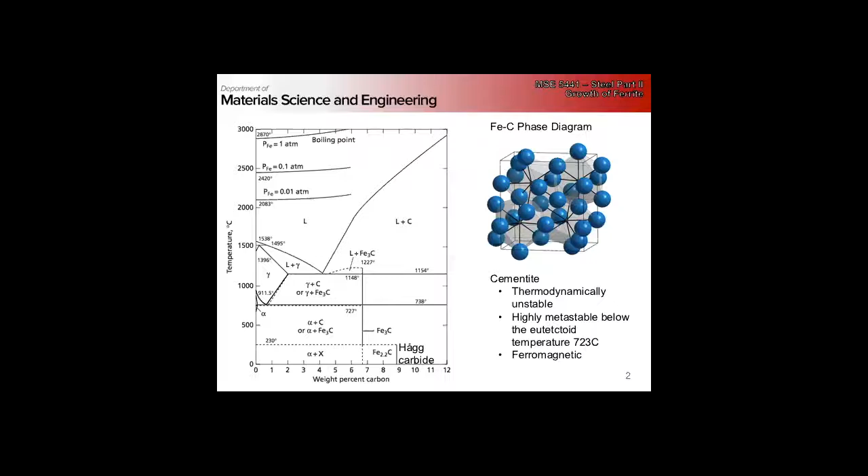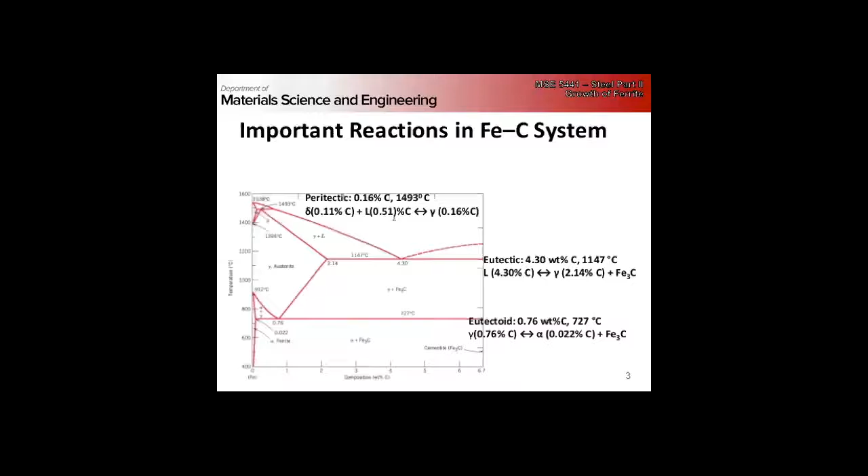Okay, so we started going through looking a little more carefully at the equilibrium, or metastable, iron carbide phase diagram. We pointed out that for the most part we're going to be concerned with the formation of ferrite and cementite and how this happens, but there are other carbides that can come up, such as Hägg carbide. We identified important reactions in the system, and we said that the peritectic reaction doesn't have too much of an effect, but really we're mostly concerned about things happening near the eutectoid region.

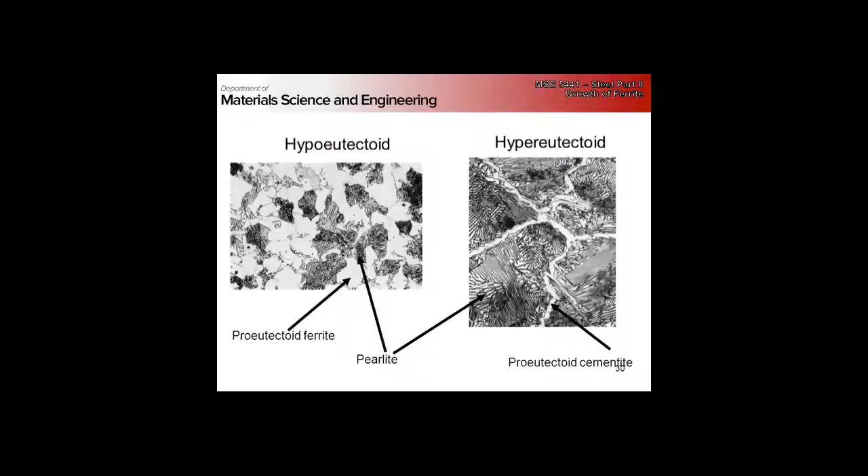And we looked at structures that come from hypereutectoid and hypoeutectoid. If we're light on carbon, then we get regions of ferrite with pearlite interdispersed. If we're hypereutectoid, we have proeutectoid cementite that forms on the prior austenite grain boundaries, and then the rest of the prior austenite grain transforms into pearlite. We'll be talking a lot more about pearlite on Friday.

So we have two main classes of transformation — I wouldn't call them mechanisms, because each has its own different mechanisms, but two main classes: reconstructive, which are basically diffusion-mediated transformations, and displacive, which involve an invariant shear or a plane strain. We also introduced this notion of para-equilibrium nucleation, which says these things are happening on a time scale such that carbon can easily diffuse, being interstitial, but the substitutional elements just physically don't have the time to diffuse. So we're not at a true thermodynamic equilibrium, we're at a para-equilibrium state.

And the proeutectoid ferrite nucleates heterogeneously at the austenite grain boundaries, and typically the ferrite nucleates with a preferential orientation relationship with one of the austenite grains. It forms this Kurdjumov-Sachs orientation relationship.

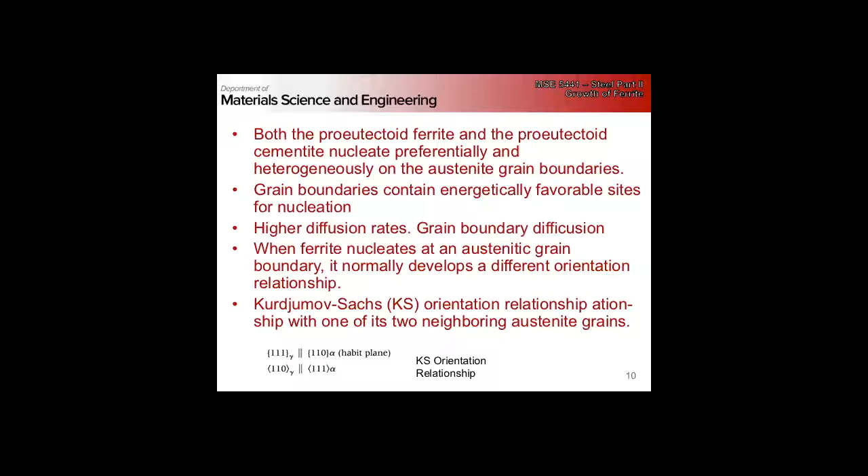Where we have the (111) plane on the gamma parallel to a (110) type plane in the ferrite, and the close-packed directions lining up. So basically this can be envisioned as a 90-degree rotation about a [211] direction, and it's worthwhile to take the time to sketch out these planes, exactly what is related to what.

Now this Kurdjumov-Sachs relationship, I said, forms preferentially with one of the two grains. But this is a very low energy relationship—it maintains that the close-packed directions don't actually change. This is a low energy interface that has virtually no mobility.

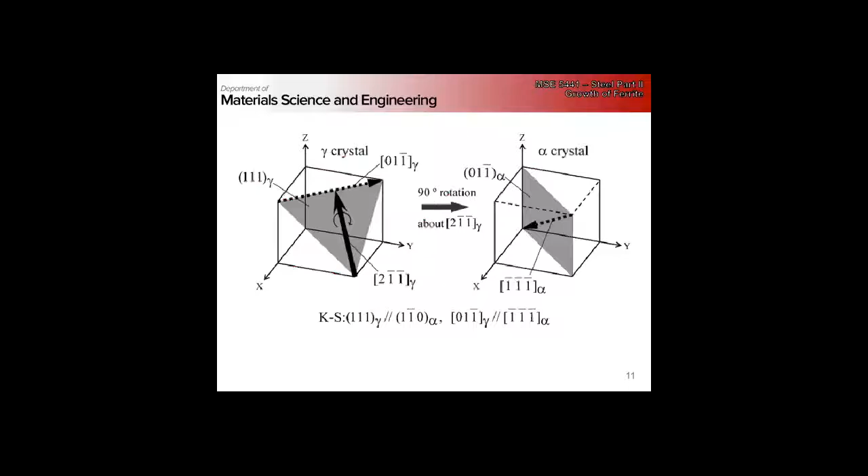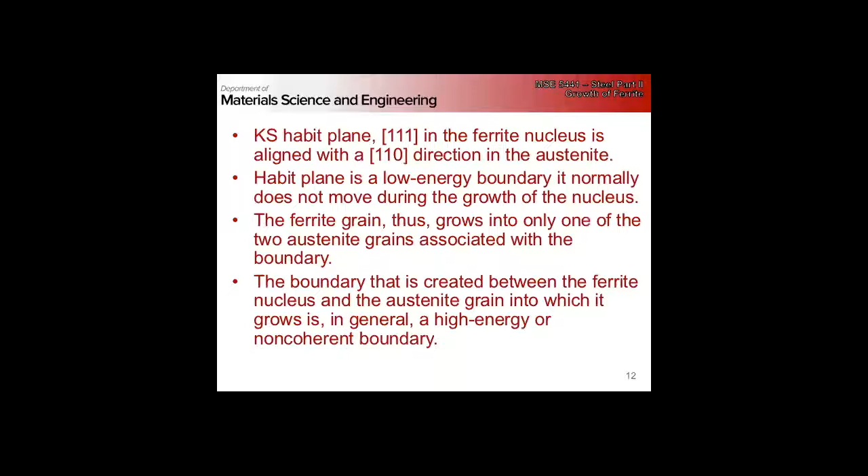So this relationship is formed with one of the two austenite grains, then our ferrite will grow into the other, leaving this relationship fixed. The boundary between the ferrite and the austenite grain into which it's growing is generally going to be a high energy, or non-coherent, interface.

We also looked at two different morphologies, which grow in different ways. The first is ferrite allotriomorphs, which grow on the grain boundary and follow the grain contour. Then idiomorphs, which nucleate heterogeneously from an inclusion in the crystal, but grow as a single crystal of ferrite, with faceted shapes that reflect the symmetry of the ferrite crystal. These nucleate without any contact with the austenite grain boundaries.

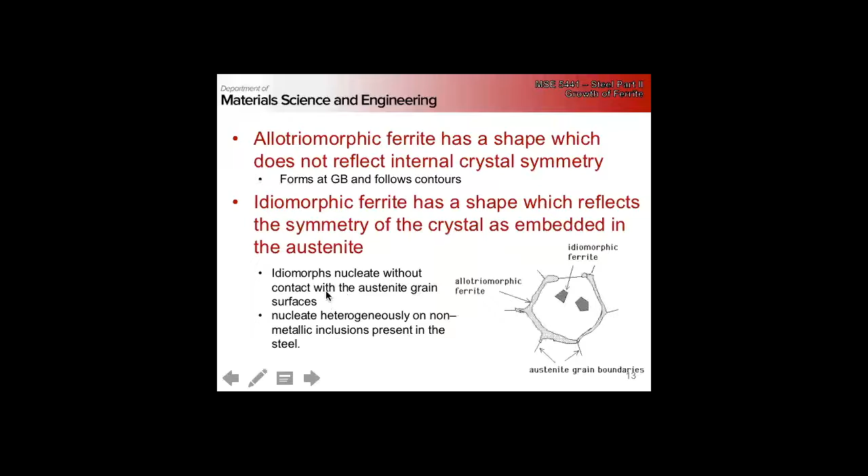Both of these occur by true diffusional mechanisms. So we don't have any shear, we don't have an invariant plane strain shape change like we will with the Widmanstatten structures. And the growth rate is either diffusion controlled or interface controlled.

Here we're nucleating these primarily heterogeneously, but this is still only going to occur at high homologous temperatures, near our eutectoid temperature. If we get too low, we're going to grow Widmanstatten. If we get even lower, it's going to be bainite. If we get even lower in temperature, it's going to be martensite.

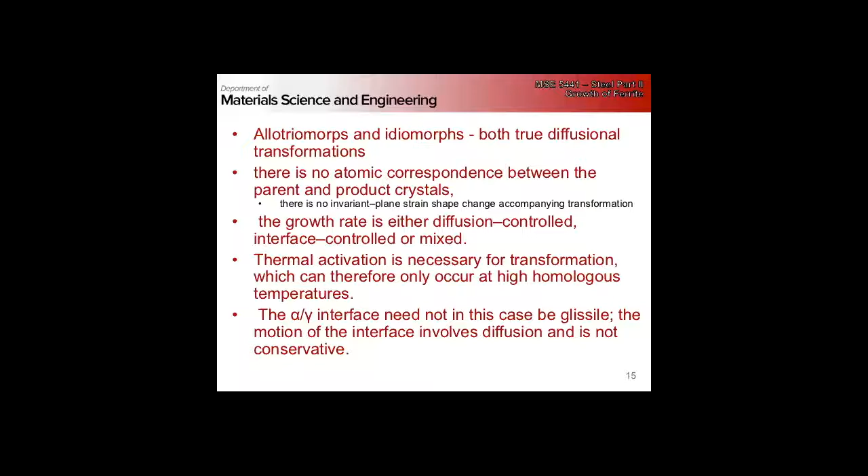How does Widmanstatten vary from idiomorphic? We'll get there - that's the next set of stuff that we got here.

Because it's diffusional growth, our main limitation is going to be diffusion of carbon in front of the interface. We're rejecting carbon from the ferrite, so we get a partitioning - a diffusion field building up in front of our growing ferrite. As our ferrite gets larger, the extent of this field gets larger, and that's actually going to retard the growth because our carbon has to diffuse over longer distances. Our thickness of ferrite increases as a dependency on the square root of time, meaning that the growth rate slows down.

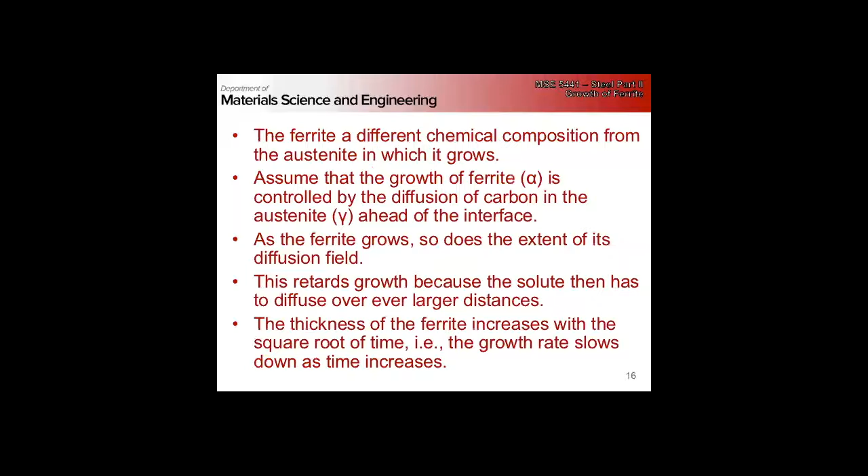I didn't put the complete derivation here, but this is basically the general idea behind modeling this. In the ferrite, we have a carbon concentration here. In the austenite, we have a carbon concentration here, if this is our overall alloy composition - this is our composition in the austenite region. We come down, we start to partition by the lever rule. So if this is ferrite here, this is the ferrite austenite interface. Here's our overall carbon concentration of our austenite. We now have this diffusion profile out in front.

We can model this by saying that the rate at which the solute is being partitioned has to be equal to the diffusion flux from the interface. So all of the carbon coming out of the ferrite has to go through that interface - it's just a balance. Then we give our conservation of mass, combine that with the diffusion equations, and we get a PDE that looks like this for the change in the position of our interface with respect to time, as a function of our diffusivities and our concentrations and the current position of the interface.

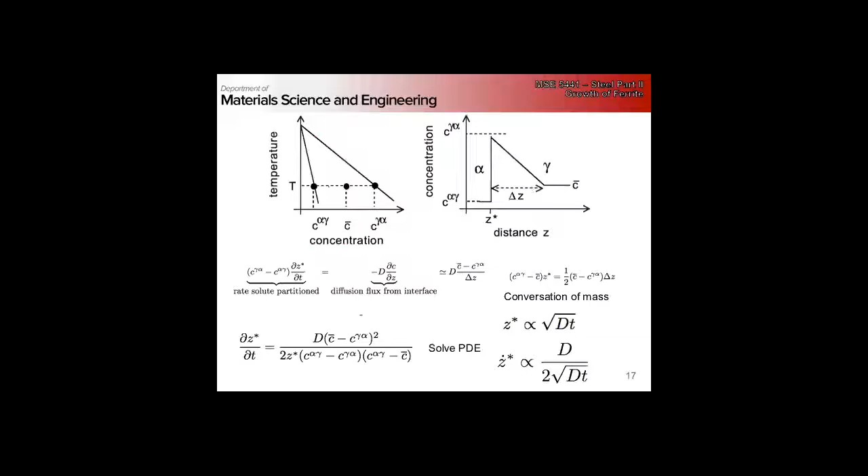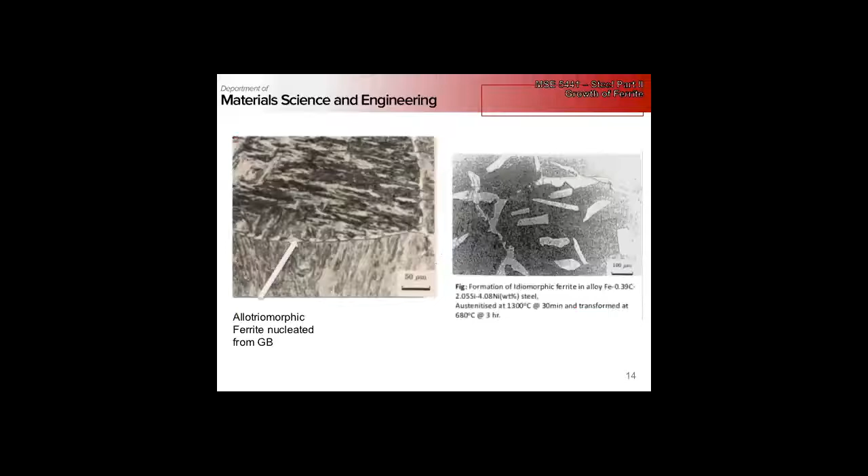No, I was just thinking of what the structure—how does this growth rate tie back to what we see in the micrographs? We don't tend to see idiomorphs with huge size disparities inside the grain; we tend to see them all about the same sort of size.

But thanks for that introduction into massive ferrite. So if our carbon content is low enough, and if we can cool our alloy quickly enough to avoid partitioning, but slowly enough to avoid martensite, we can get a massive transformation. That's reconstructive, a diffusion-mediated transformation where our ferrite is the same composition as our austenite.

And that's only going to depend on short-range diffusion, because everything is the same composition—we're not partitioning carbon out from our ferrite, so we don't have a diffusion field out in front. It's only atomic jumps across the growing interface, so it's interface controlled.

How does that work out relative to the free energy diagram? Because if you have one phase transforming to another, wouldn't you need to change composition? Yeah, so what does that imply?

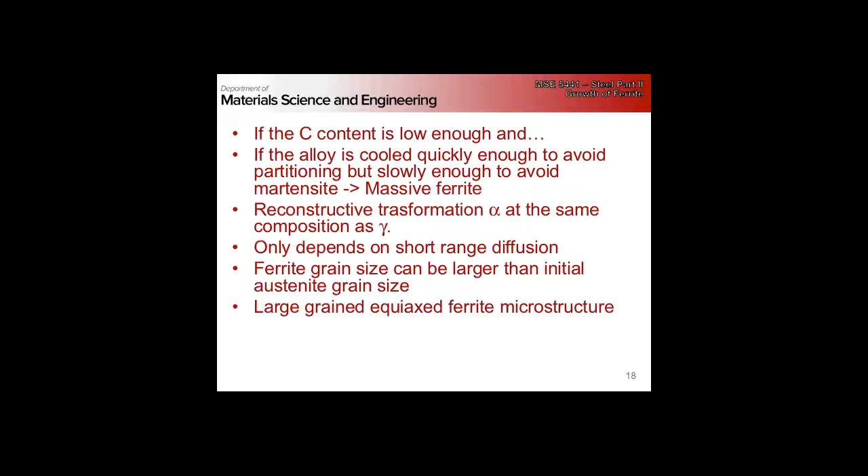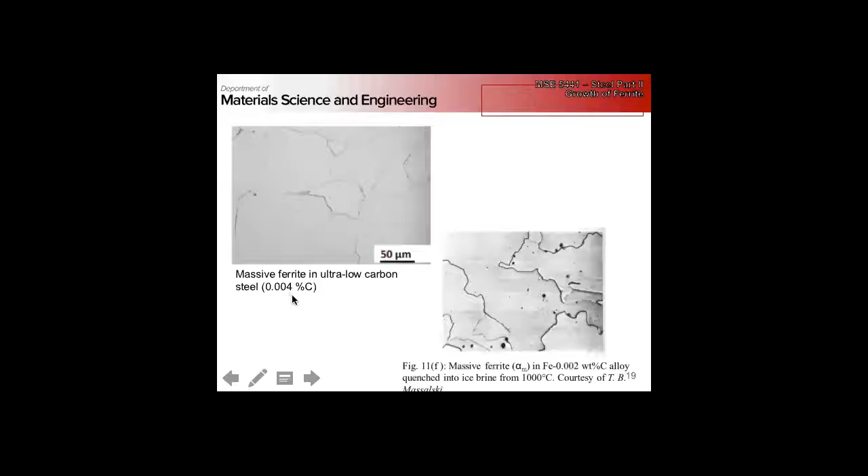So we have microstructures that look like this, nice, not perfectly clean equiaxed, right? But notice the carbon contents of these. These are ultra low carbon steels. This is 0.004 percent carbon, so 4/1000 of a percent, 2/1000, by weight.

Okay, so back here, now we're going to move on over into the displacive transformations. We're going to talk about Widmanstatten ferrite, and then on to Pearlite, then back to bainite and martensite. So we're sort of hopping a little bit here.

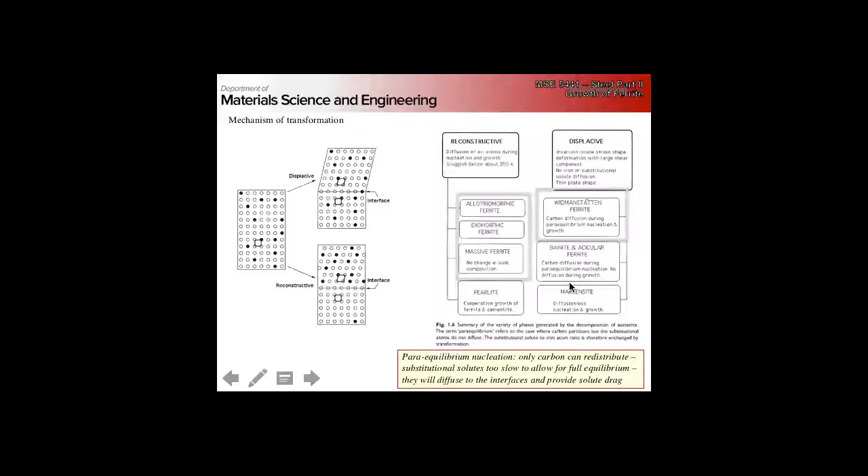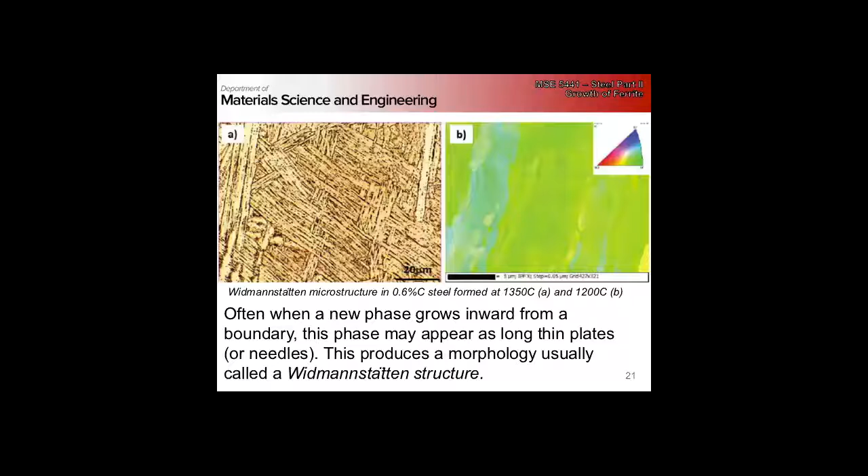So we have two basic classes. We've got primary Widmanstatten ferrite that grows directly from the austenite grain boundaries, and then secondary that grows from any grain boundary ferrite that happens to be there, so any allotriomorphs of ferrite that happen to be there. And this is a displacive transformation.

And so there's a shear associated with this. So you can imagine if I'm nucleating and growing, and I've got a shear, this is going to give me this sort of jog on my surface, or in my crystal, that this needs to be accommodated. And if this is in a polycrystal, I've got neighboring grains that are pushing back on this. As this grows, that shear gets larger and larger.

You can imagine a deck of cards, and I offset one card next to its neighbor by a small amount. But if I do that for every card, that shear just builds up and up and up. Eventually, if I take that small shear across the whole deck of cards, I've got a big displacement from one side to the other. So this is happening, and energetically...

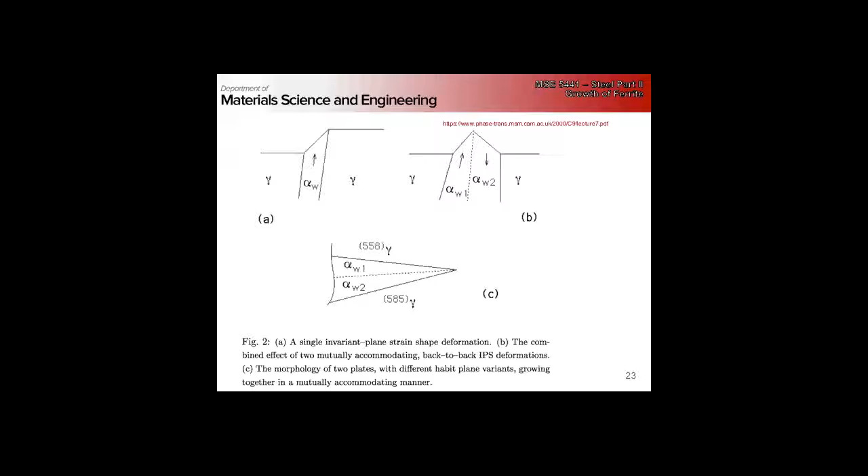Okay, so carbon does partition. Again, we're always at para-equilibrium, and we're going to grow at a diffusion-controlled rate. The rate is going to be controlled by the diffusion of carbon ahead of the plate tip. So, unlike idiomorphs, which are growing out in all directions, here we're growing along a plate.

So the analysis of this becomes similar to the growth of dendrites. The tip is always growing into fresh austenite. Our carbon can be partitioned out the sides, whereas our tip is always growing into fresh austenite.

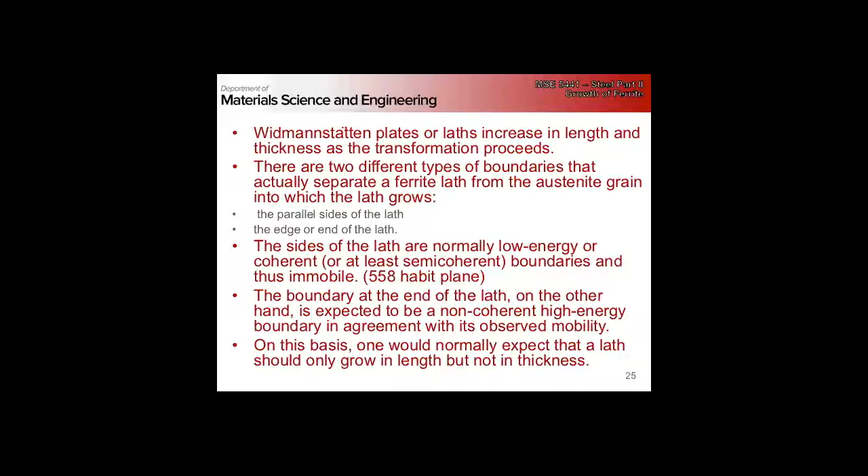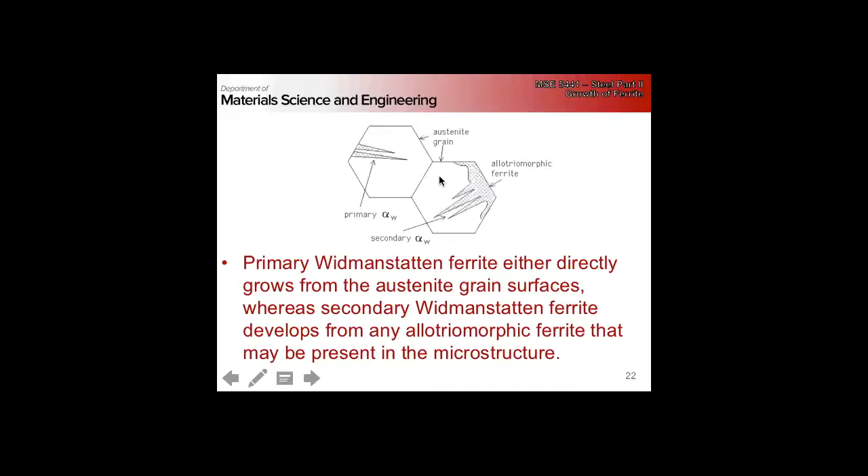They grow across. If we go back to our little picture here, they nucleate and grow across, but eventually have to thicken to come in contact with each other and transform. This won't be the last time you see this, but basically what happens is these laths thicken as a result of ledges or steps.

Imagine here, this part of the ledge is our coherent low energy interface. We don't have much mobility orthogonal to this direction, but if our interface is made up of these steps, we have high energy interfaces here with high mobility. So this can grow by extending the ledge, all of these ledges this way. We can actually have thickening of the laths without breaking that coherency, without destroying the coherency of the interface.

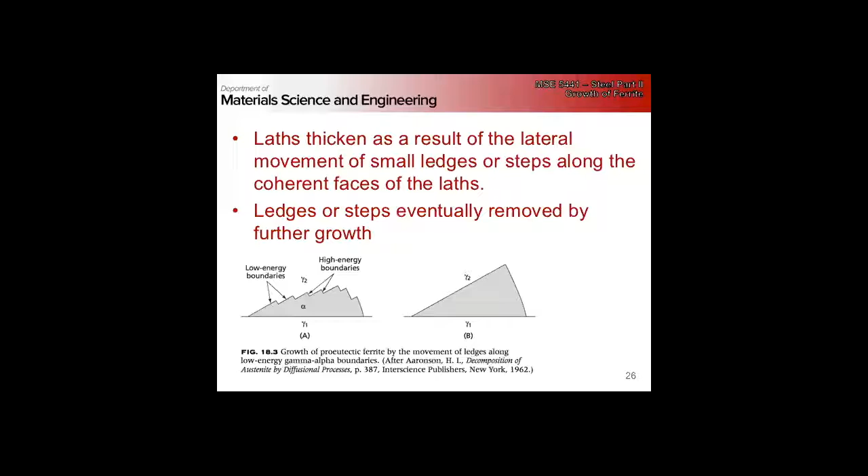We're not forcing that coherent interface to move. And then as this grows out this way, extends, we get new steps and ledges that continuously form. Once it stops growing, once it's extended as much as it has, we eventually continue to grow, and once all of these steps have moved all the way across, now we're left with a nice, clean, coherent interface.

Higher energy, but how so? Remember, we've got partitioning going on. So the smaller the tip, the easier excess carbon can diffuse away—we're not pushing as big of a diffusion field out in front. So the thinner our tip, the faster the growth rate.

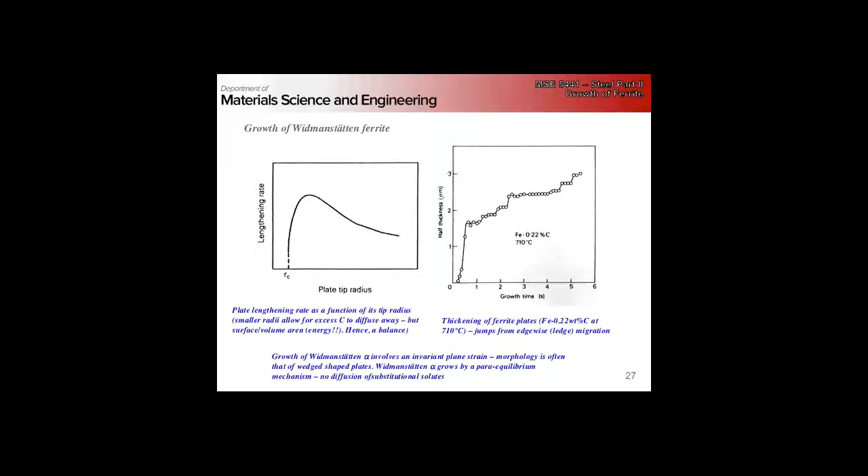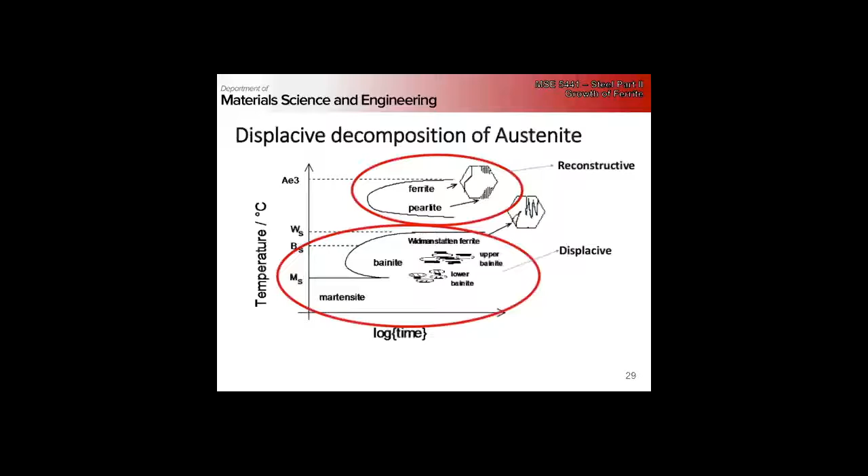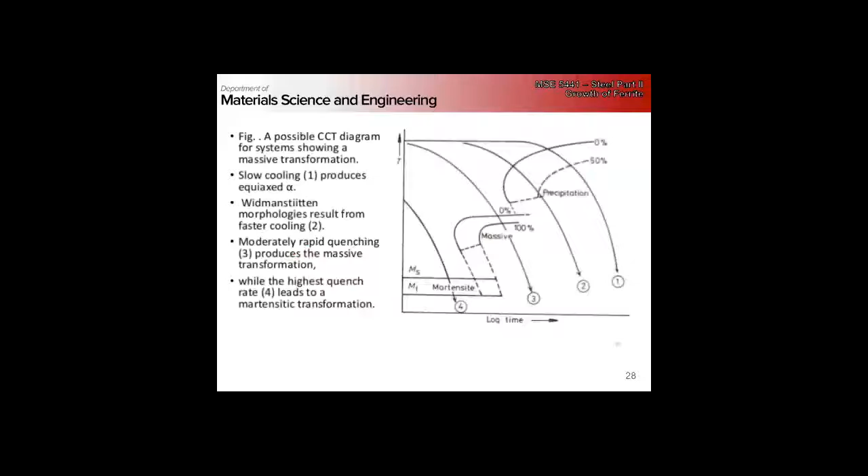I wanted to make this a little earlier, but slow cooling gives us an equiaxed ferritic structure. Slightly faster cooling will give us Widmanstatten. Massive occurs without partitioning, so we need to be a little faster for massive, but we're still well over for martensite. The bainite would be in here as well.

And then this just gives us the changes—this is the shear strain associated with each mechanism, this is the volume change associated with it. So all of our reconstructive transformations have no shear associated with them, but we do have the volume difference, the change from austenite to ferrite, and the resulting morphologies that come up.

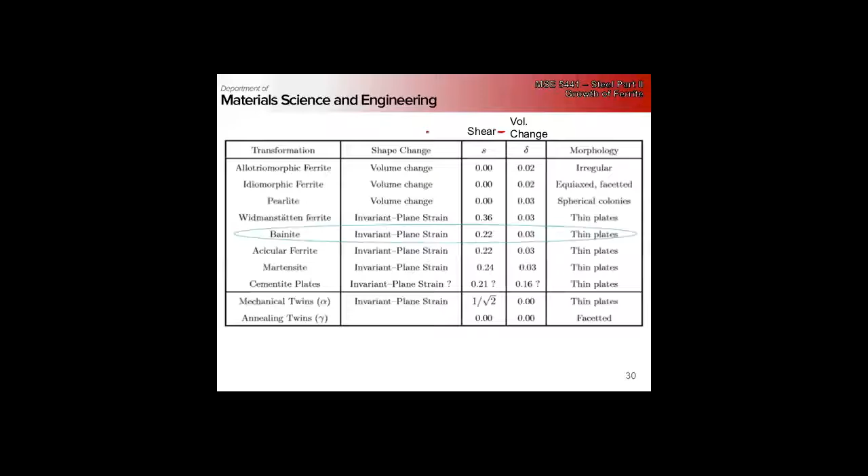So keep this in mind. Okay, so that's the general gist for equilibrium ferrite. Now we need to talk about what's happening with the cementite during this.

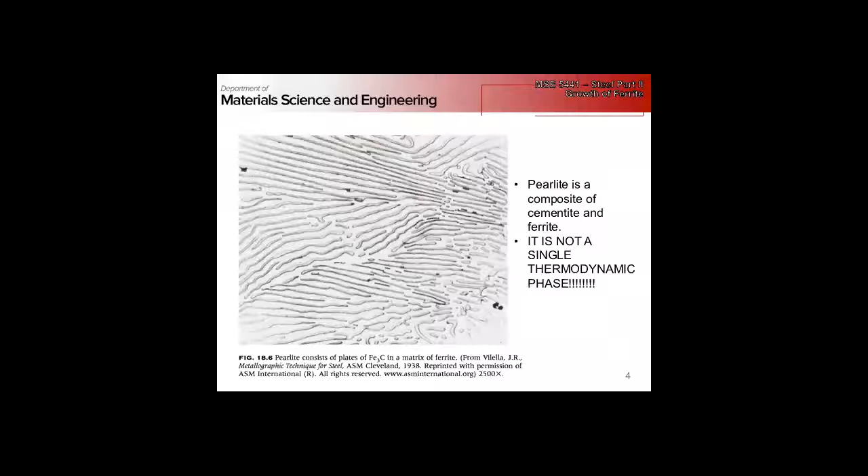Actually, before that, let me go to the next slide. So this is pearlite. What do we notice about this?

What did you guys think the first time you saw this from the microscope? Probably in the sophomore lab? Pretty. Did it move anyone to tears, or did anyone thank their deity of choice for creating such a wonderful material that makes our lives so much better?

All right, it's complicated, right? It's sort of this messy, squiggly, layered structure, right? Before we jump into details, pull up and think about all the physical metallurgy you've had so far.

Think about all your material science. What do you think the properties of this is going to be? The individual phases and the composite as a whole. All right, what about strength?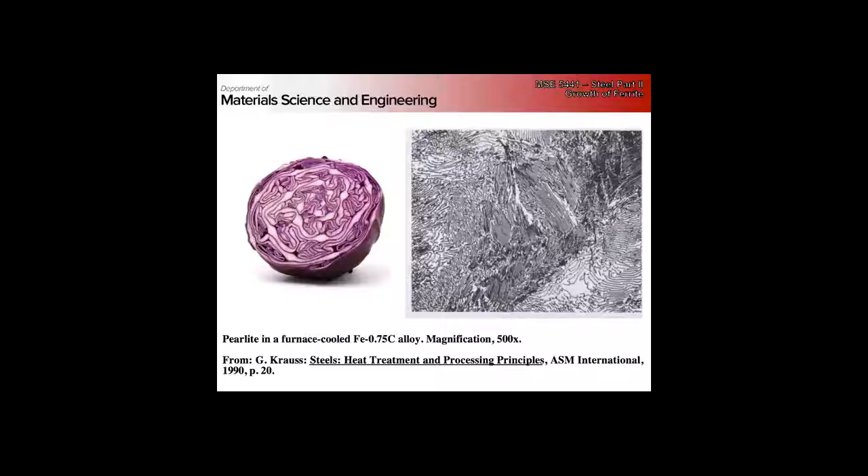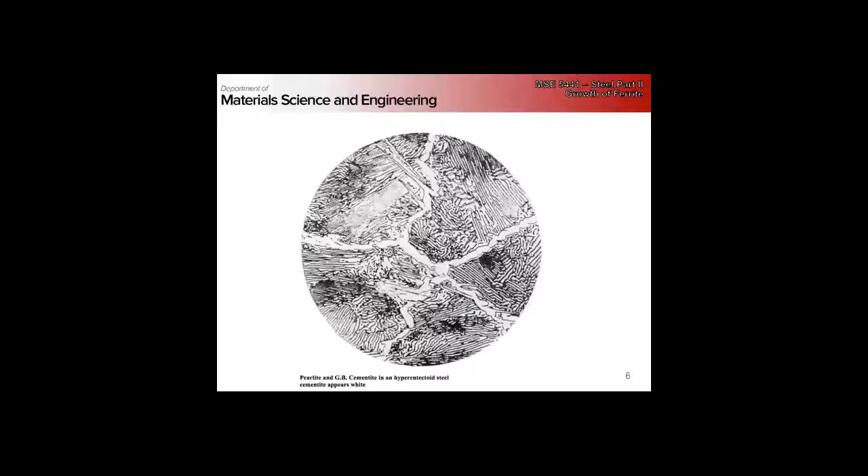Just here's sort of an example. Here's what it looks like when you're hypereutectoid, right? Our grain boundary cementite with pearlite in between, and then if we're at the eutectoid structure, we come down, we can just use the lever rule to determine what the fraction of the ferrite versus the fraction of the cementite is, given our carbon content.

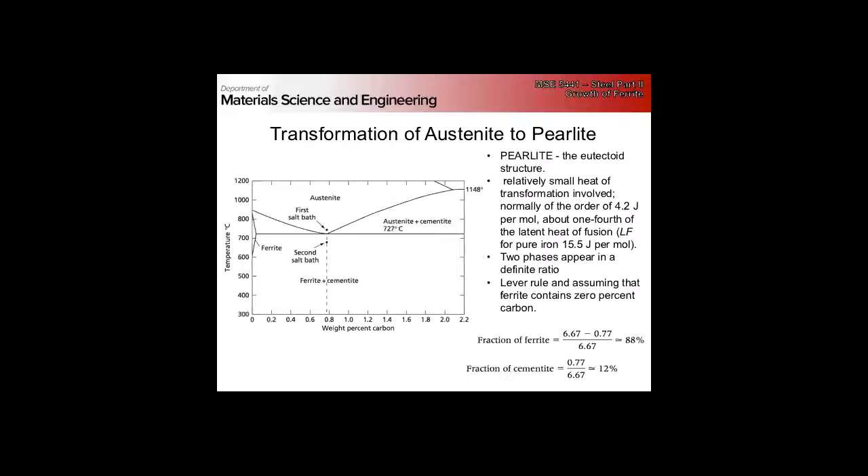So for eutectoid steels, we're actually 88% ferrite, 12% cementite, but looks can be deceiving. I'm sure most people would have said this is probably a higher cementite fraction than 12%. And remember, this is by weight here, so it's 12 weight percent cementite, not volume.

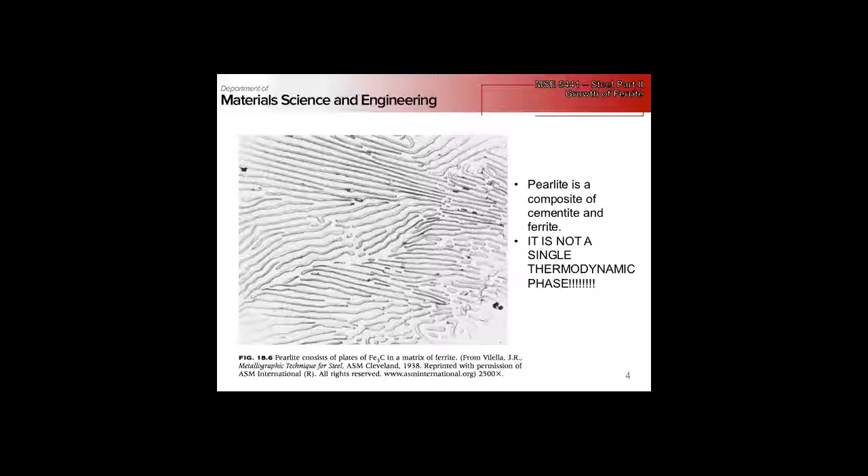So we'll stop there. Friday, we will go through the ferrite. Monday, remember...